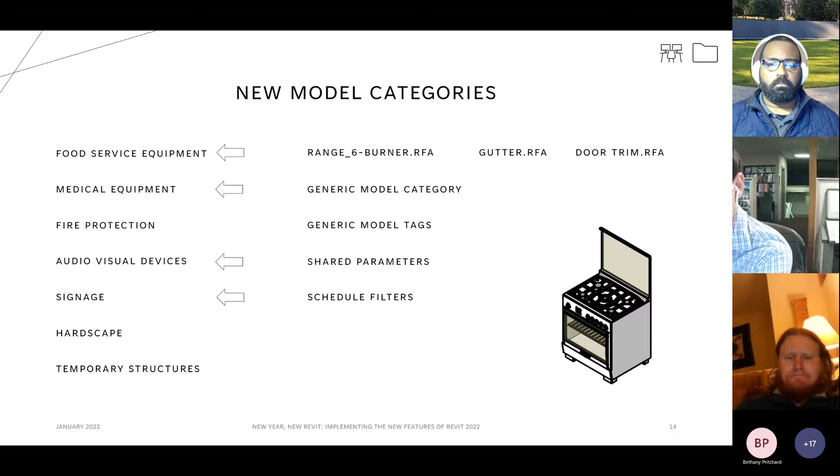You're likely using generic models to model a variety of things within your building. I have a lot of clients that use it for gutters and door trim. And if you want to separate out the information, you have to do so through generic model tags, shared parameters, schedule filters. But now with these new model categories, if you wanted to separate out the information for food service equipment, it has its own category now.

And that way you can also have its own food service equipment tag, its own food service equipment schedules, and you no longer need to use shared parameters and schedule filters to separate out that information in the model. Of course, you can still use them if you wanted to and refine it further, but it's no longer necessary as it was before.

With new model categories means we have to make some graphics updates to our Office template file. I mentioned on the previous slide about object styles, the highest level of that graphics hierarchy that sets the default. Here we need to adjust for that in our Office template. So your Office BIM manager will have to go up to the Manage tab, go to Object Styles, and then under the Model Objects tab, you can set the line weight, color, and pattern for each one of those new model categories.

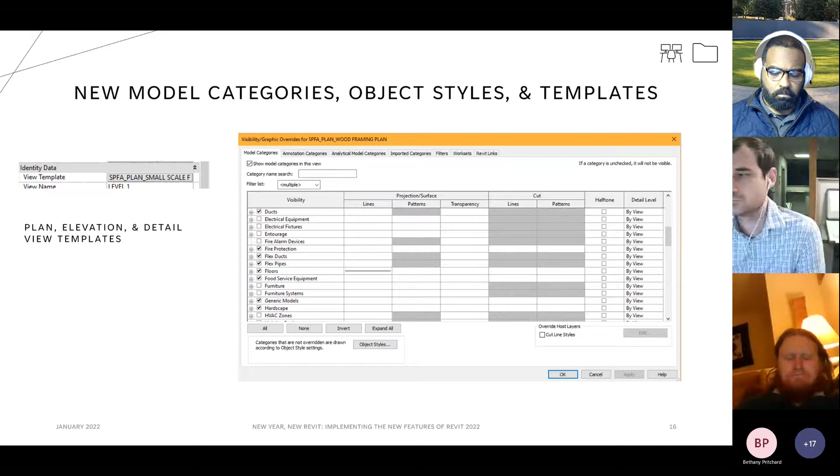The next graphics level that we talked about was plan, elevation, and detail view templates. So if you had those pre-built into your Office's template file, you're going to want to go ahead and adjust those as well. So look for those new model categories and do any more overrides on how you want that to look in your plan views and your detail view templates.

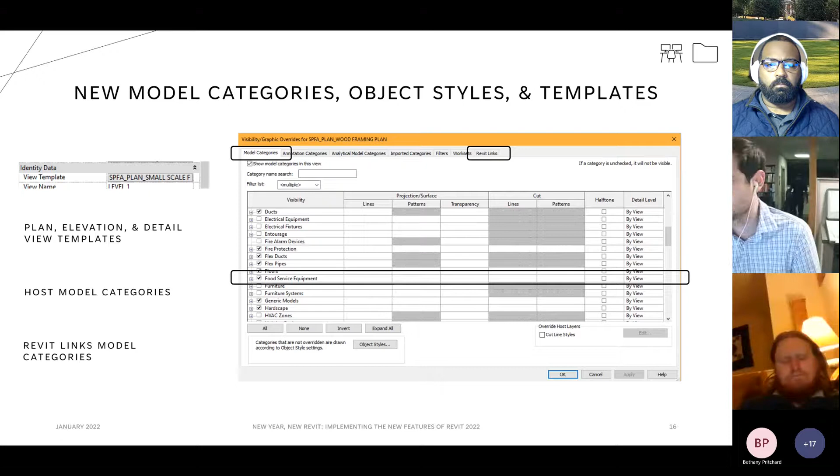The third thing that we need to be aware of or change is how these new model categories look in our Revit links. So as a structural engineer, we're always linking in an architectural model and a mechanical model, and we always customize the display settings. So we'll go through and we'll change all the line weights of the architectural model to a line weight of 1, so it doesn't affect how our model looks in our plans. So if you have any sort of placeholders that are set in your template, or just be generally aware that you have to change the settings for these new model categories.

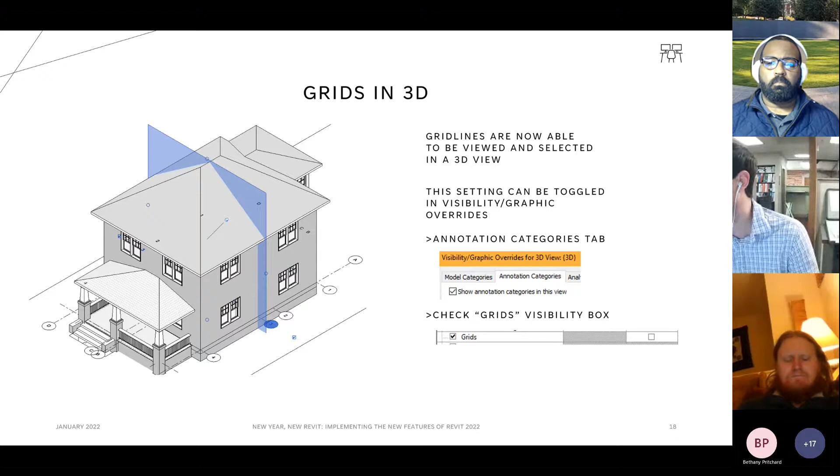So this is a really cool new feature. You can now see grids in 3D. You can actually select them and see the plane that it intersects. If you're in a 3D view and you don't see grids, you can simply go to the visibility graphic overrides or type in VG. There you can navigate up to the annotation categories tab and just make sure that grid is checked so it's visible in that 3D view.

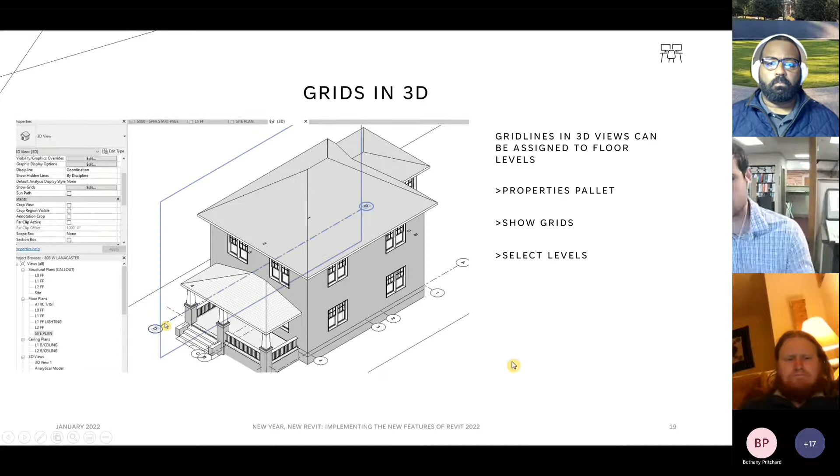So grid lines in 3D views can also be assigned to different floor levels. To do so, you go up to the Properties palette. So here I'm just showing how to select a grid. You go over to the Properties palette, and then there's a new line that says Show Grids. And then you check the boxes for the levels that you want it to show. And you can have it on 1 or more levels if you wanted to.

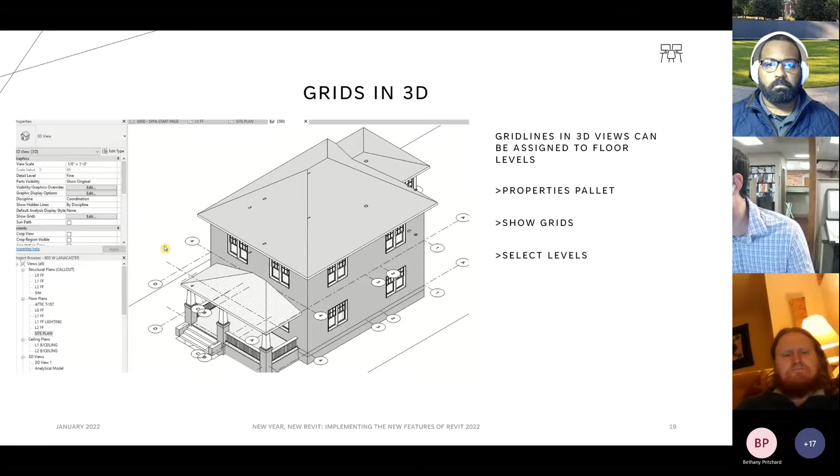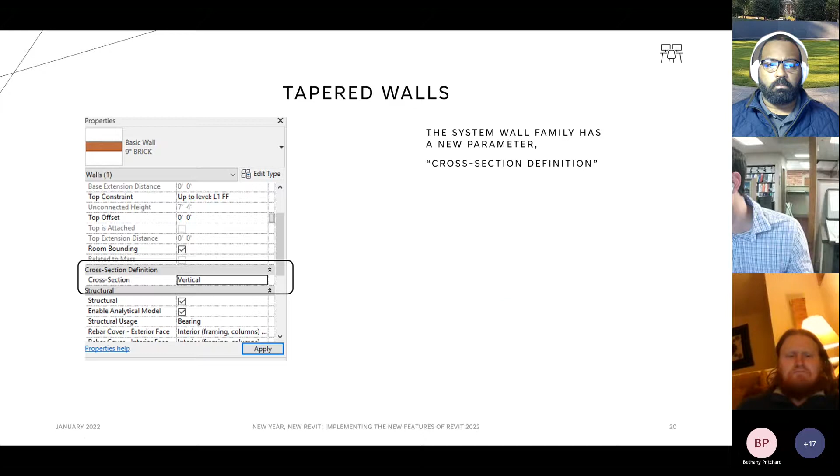So Revit 2022 has introduced tapered walls. Tapered walls are a great new feature, especially if you're modeling a landscape retaining wall or you're modeling an existing masonry pilaster. And so to model a tapered wall, there is a parameter called cross-section definition whenever you select a wall. And there are three options under this. You have vertical, slanted, and tapered.

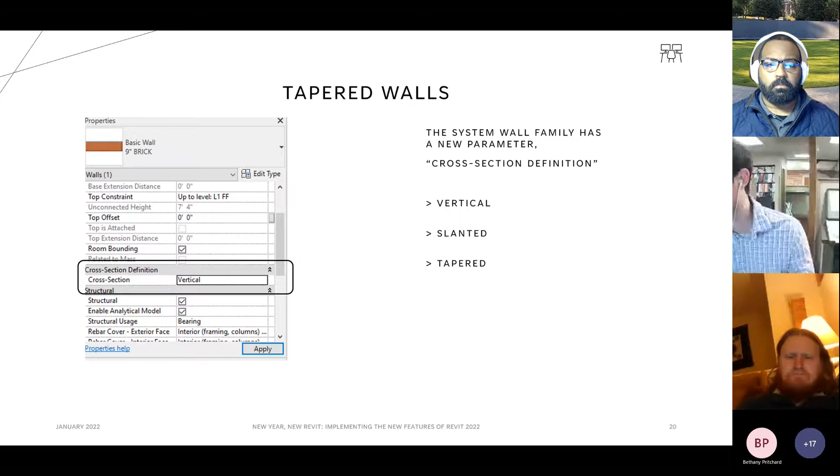If I were to go and just select any wall type that I had already built into the model, I wouldn't be able to select tapered. And the reason for this is that tapered walls require the structural material to be set to variable. So my workflow on a tapered wall would be to duplicate a wall type and just create a new sort of variable version of that. So here I'm naming it 9-inch brick with variable in parentheses after. You then go into edit structure and just make sure that variable is checked so we can create a tapered wall.

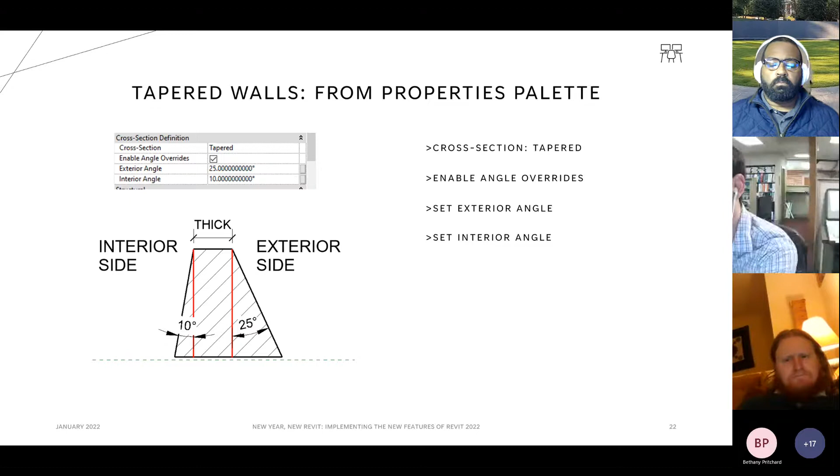So you can actually model tapered walls in two ways. The first one is from the properties palette itself, which I showed you on the previous slide. So in that dropdown, we would select tapered, and then three new parameters would show up: enable angle overrides, exterior angle, and interior angle. And I'll show you how to do so. So we just select that variable wall type here, and then we navigate over to the properties palette, and we just make sure that's checked and just enter in the angle values that you would like.

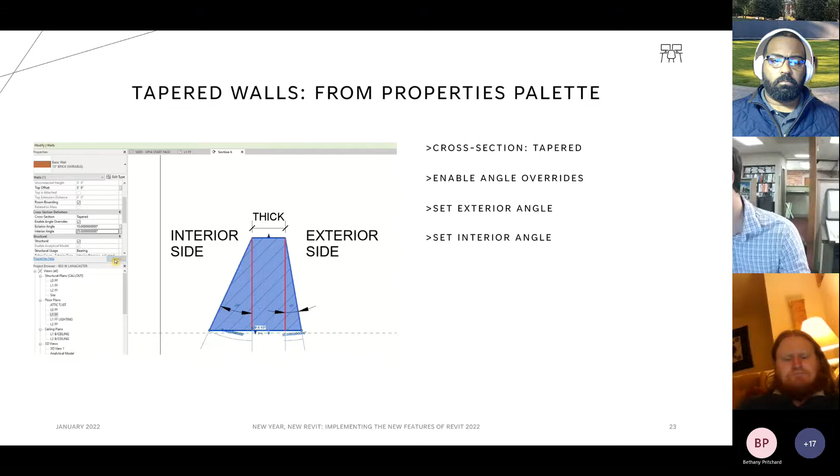So tapered walls can also be modeled from the type properties itself. You can have a default exterior and interior angle, and this will give you the same values or the same tapered wall as the previous slide.

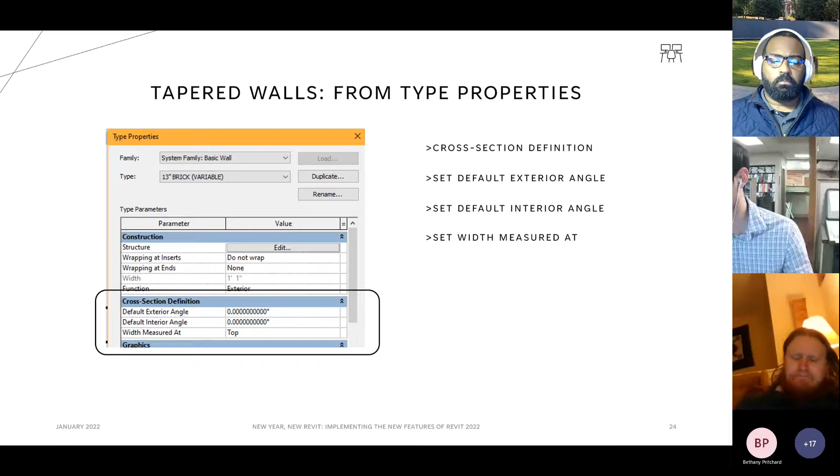So you can now edit profiles on slanted walls. So I think slanted walls were either introduced in Revit 2020 or 2021. However, you were previously restricted. You couldn't edit the profile of that wall as you could a vertical wall. And now you're able to do so. So if you have any sort of odd opening in a slanted wall or a corner condition like I'm showing on this slide, you can edit that outline.

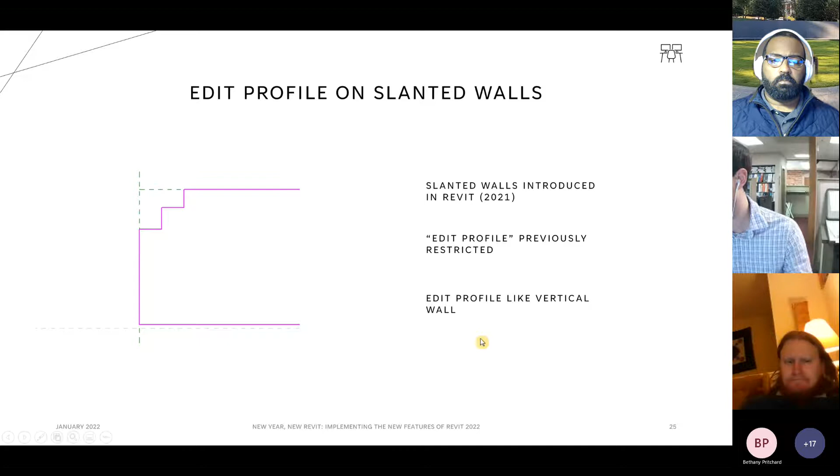So Revit 2022 has brought some great new efficiency enhancements that will really improve your workflow. The first being there's this new feature called snap to middle between 2 points. So whenever you're in a sort of draw tool setting, you can right-click and select snap overrides. And then you can select snap mid between 2 points and select 2 points. And you can immediately start drawing.

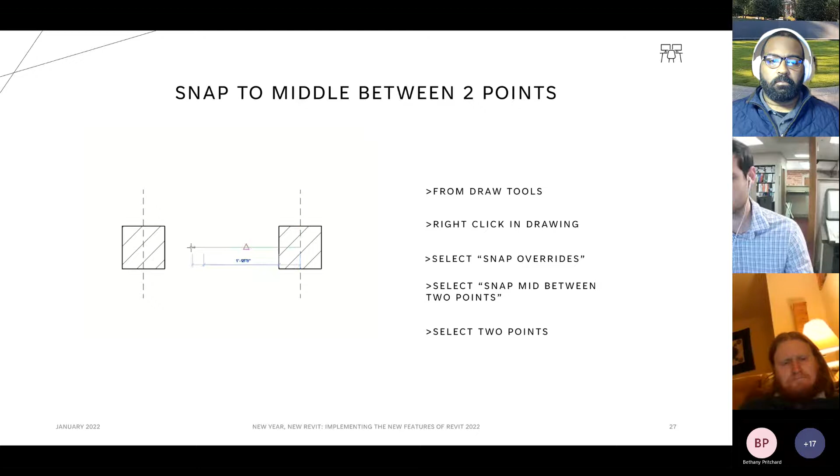So this is a cool new feature. Your current workflow to do something like this might be to draw a line and then snap to the middle between these two, but this gives you another option.

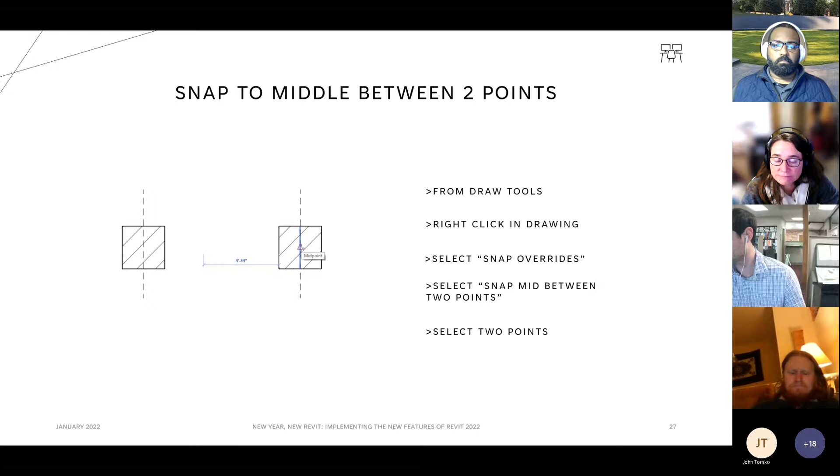This one's a big one for me. You can automatically lock and align. So I use the align and lock tool a lot, especially with slab outlines. When I'm drawing the perimeter of a floor slab, I'll align and lock it to the interior face of a wall. That way, throughout the design process, if you're moving walls, the slab will move with it. But when you're doing so, you have to hit the little lock icon when you align.

Now you can do it automatically. So from the align tool or using AL, you can just hit this little lock icon at the ribbon panel, select your reference line, and then select the elements to align. And you'll see that little lock is already locked, so you know it's automatic, which is a really great time-saving tool.

So I believe in Revit 2021, Autodesk started moving your out-of-the-box content family away from being downloaded on your C drive and on your actual computer, and has moved it towards the cloud. So they've added this sort of Load Autodesk Family icon. And what's great about this is you can now load multiple families at the same time.

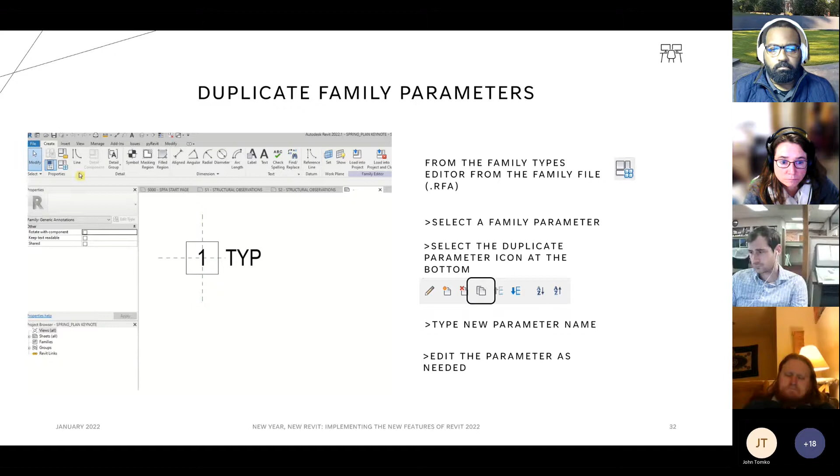So now architects can select all the rooms and spaces and change any parameters as a group from there as well. So that's a great new feature.

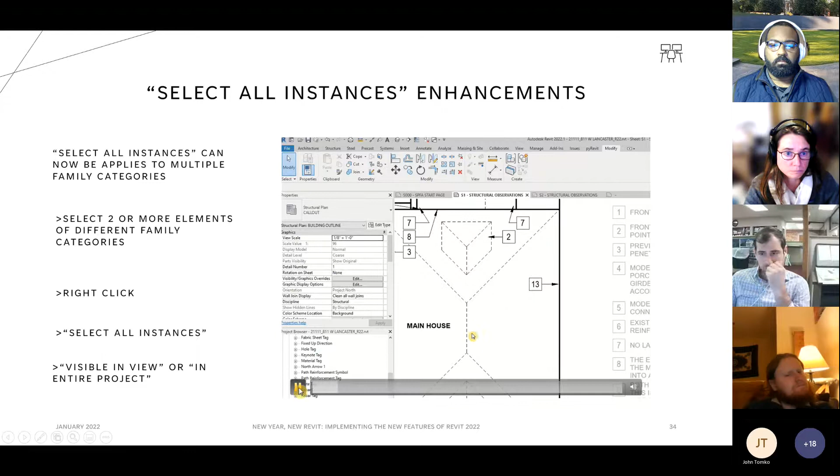Another interesting feature about select all instances is now you can select 2 or more different categories. So in this example, I'm going to be selecting a detail line, and I'm also going to be selecting a text annotation. And I can right-click, select all instances, and then now I have 29 selected there. So really interesting new feature.

Okay, so just a little rundown on materials. Materials are comprised of different assets. You can have graphics, thermal, appearance, and physical. And these material assets can be shared amongst other materials. They're not exclusive to a material in Revit.

And your current duplicating material workflow is that you have to duplicate the material, but it likely duplicates the asset as well. So for example, if I had a concrete material and I wanted to duplicate it for a lightweight version of it, I would still want the appearance asset to still look like concrete. So if I duplicated this, it would duplicate both the material and the appearance asset.

But now there's a new feature where you can duplicate using shared asset, where the duplicate and the source material share a common asset. So if I were to duplicate with this approach using shared assets, it would no longer make a duplicate of that appearance asset. And this is important because you don't want unnecessary or redundant assets in your material library, because that doesn't give you fine control over the information that's held in your BIM model.

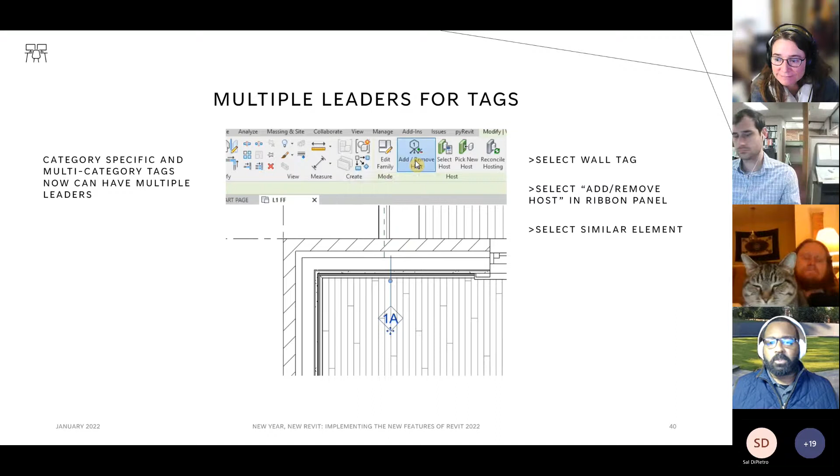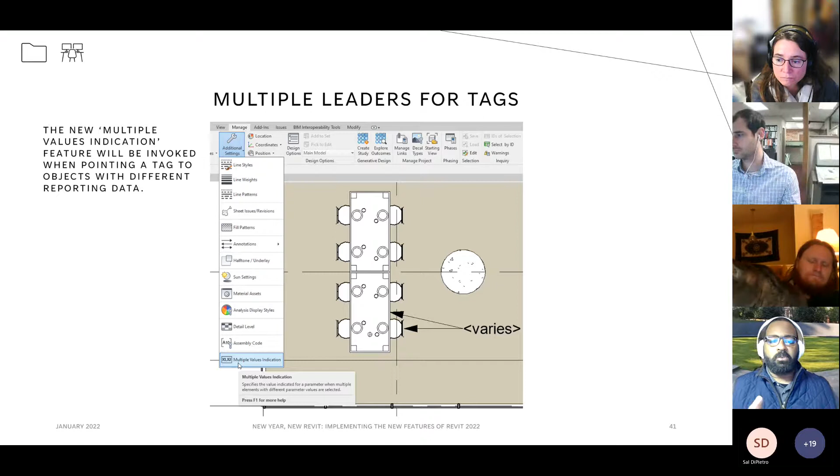Now, of course, you're going to ask, what happens when these leaders have something that is different? Not the leaders, but the things that are being touched. Well, that invokes the use of a new feature for this particular feature of tags, the multiple values indication. What this is going to give you the opportunity to do is to either by default present what is given to us as open caret varies close caret. It is in lowercase, I don't know why. That'll be one of the first things I'm going to add as an affix, or you can add some new custom text that will make more sense for your drawings.

I will tell you that this multiple values indicator is going to be used anywhere where two values can't be reconciled. So think about your schedules, your instance parameters view. When those say varies right now, if you change the value here to say, I have no idea, it's going to say, I have no idea in your instance parameters. And as a bonus tip, if you need to clean up your data and get those two elements to have the same value, we can simply select the multiple values indication item and change the value, and it will update the information on both of those components.

Another nice new feature for the multiple leaders is the ability to include a count within the tag information. Now, this is going to be a type update. So your BIM manager or your project coordinator will need to work on this, and that's the reason why we have the symbol up there for a template update. In order to make this feature available, we'll need to edit the label and select multi-leader tag in the properties here, which will give us the ability to select the host count, and we're going to add that to our tag to allow it to be visible. So again, it'll be a different type. Okay.

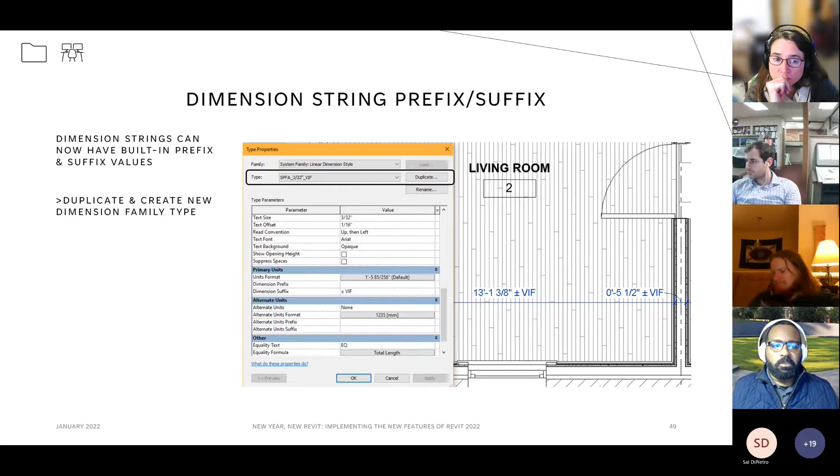Here's the steps. Duplicating the type from a typical dimension style. Enter those values, and it's easy as that. Okay, let's move into visibility graphic enhancements.

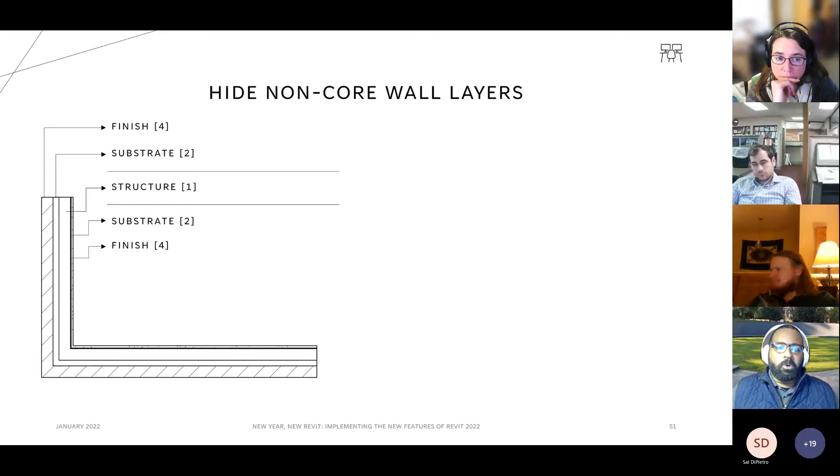So let's say you have a layout view and you would like to clean up the visibility of that layout view so that we have just the core. That might be the most important part of the wall construction that we need to convey to the contractor to tell them where to put the wall. Of course, walls are created with many layers of information, from the finish on the exterior all the way to the finish on the interior.

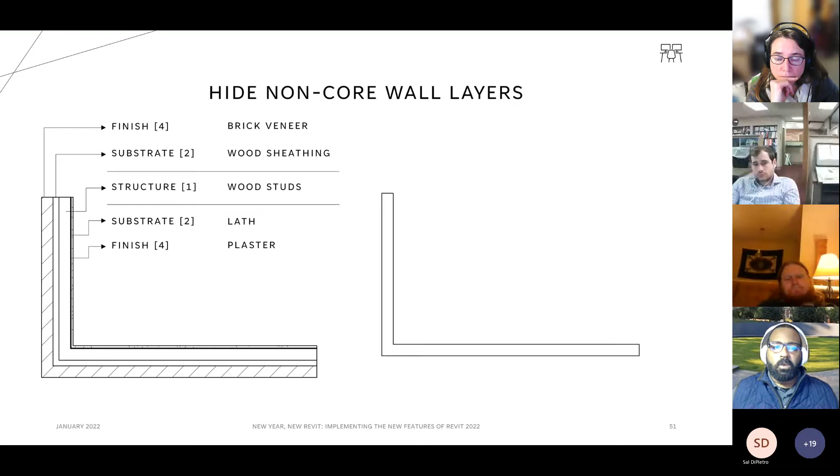In that definition, we're going to have a plane or a couple of planes that define what the core is. So any layers that are in that core, those are going to be visible when this feature is invoked. To bring up that hide non-core feature, it's going to be going through visibility graphics. We're going to come down to our walls and uncheck the non-core layers, and voila, our walls are cleaned up.

Some things to mention about this tool that I've found as I was playing with it. The wall lines that you see right now, they will still not be automatically selected when you're using dimension strings, unless you use the dimension style for core, center line, or edge of core. With the non-core lines not showing, your edge of wall dimension features will not work.

And another small feature or caveat to this particular tool, walls in previous phases are not going to respect this setting. So they will still be showing their non-core layers.

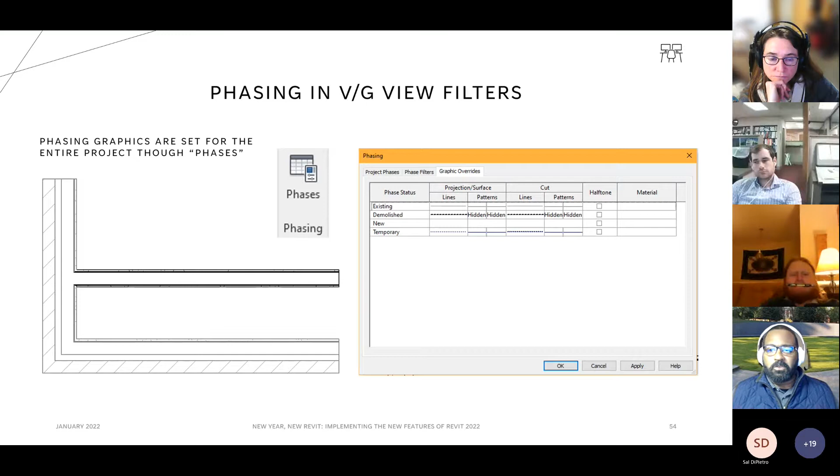Okay. I was really excited about this one, and in Revit 2022, we now have the ability to be more adventurous with our overrides for phasing. In previous versions, our phasing overrides were pretty hard coded in where they were in time. Your graphic overrides for phases were locked into the phase state across the entire project. Now we can call on phases to apply the overrides through filters and through the visibility graphics control.

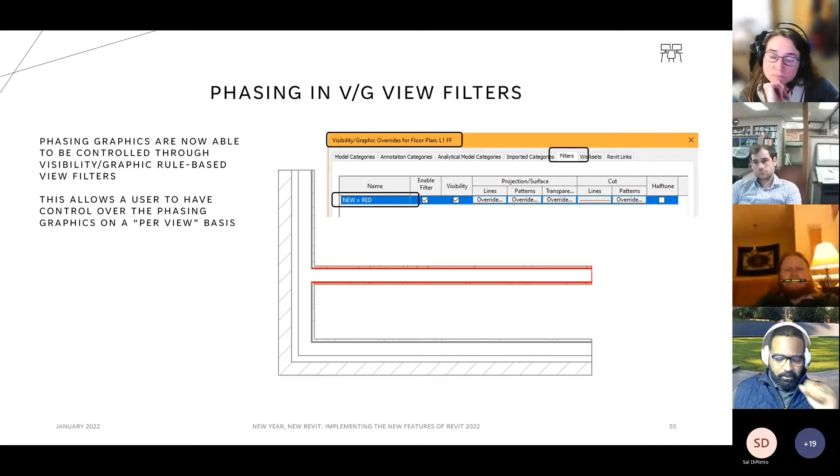This will give the users much greater control over the graphic qualities of existing information. But what I was really excited about is the ability to use this feature as a way for us to show demolition drawings in a much more intuitive way. Before, demolition plans required an overlay of two different views. At least that's the workaround that we've used. An overlay of two different views, one that had the graphic information and the other that had the room names.

Because demolition is an action that happens in the new construction phase, that means that the rooms that were being displayed in the demolition plan were new construction rooms. Now, what we can do is create existing floor plans for demolition drawings, and we can use this filter to find not just walls, but any elements within this plan that are going to be demolished in a future phase or any phase we select. After we've created that filter, we can then graphically override that to match our demolition graphic overrides. So great new workflow for demolition drawings.

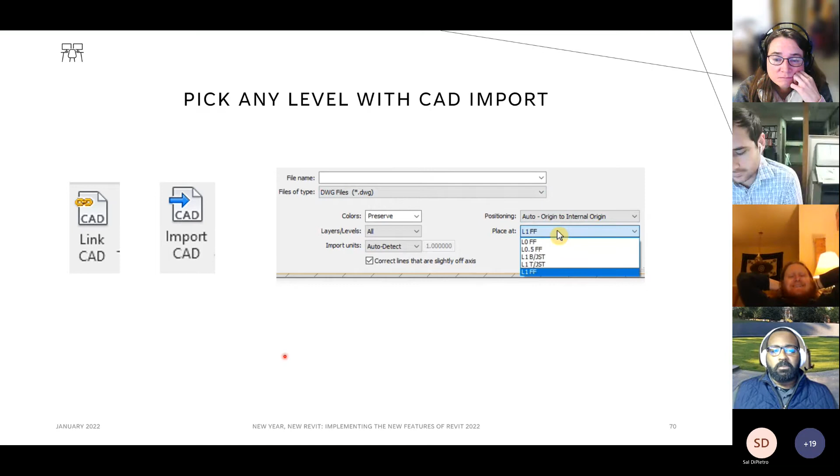Okay, getting into the smaller stuff here. With our CAD imports, we can now select which level those imports go to. We had that ability with CAD links, but now we have it with imports. Rhino models can now be linked, not just imported like we were having to do before. And this may be helpful for any offices that might be doing conceptual work in Rhino. We may now be able to work simultaneously in the two platforms and have things talk between each other.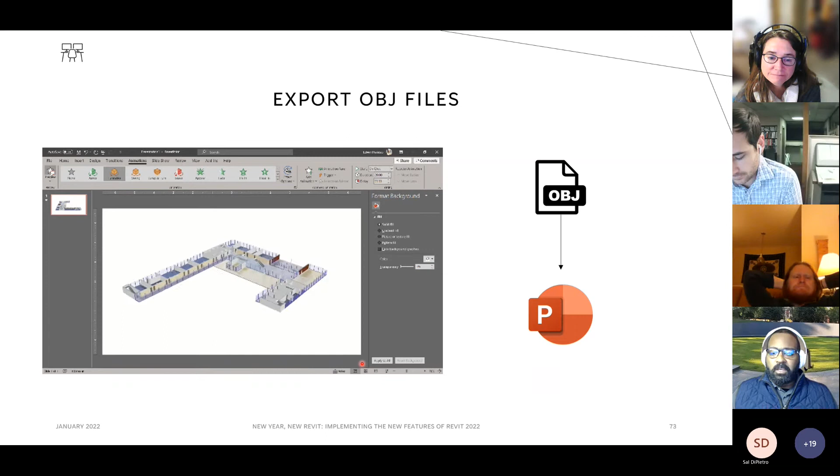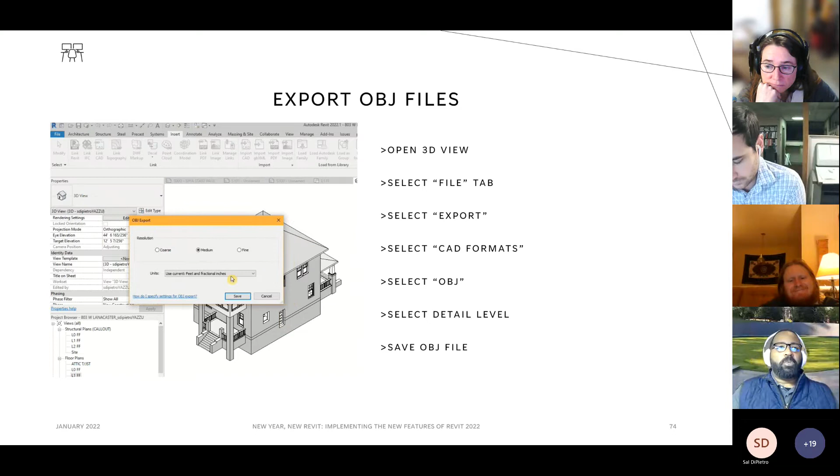The OBJ export has support in PowerPoint. So we can now present natively in PowerPoint our 3D forms. Coming out of Revit, we're going to use the workflow of, come on, let's go. Come on. Try it now. There we go. Opening the 3D view, we're going to select the File tab and Export. We're going to go to CAD formats and select the OBJ export file type. You get to select which detail level we want and save the OBJ file.